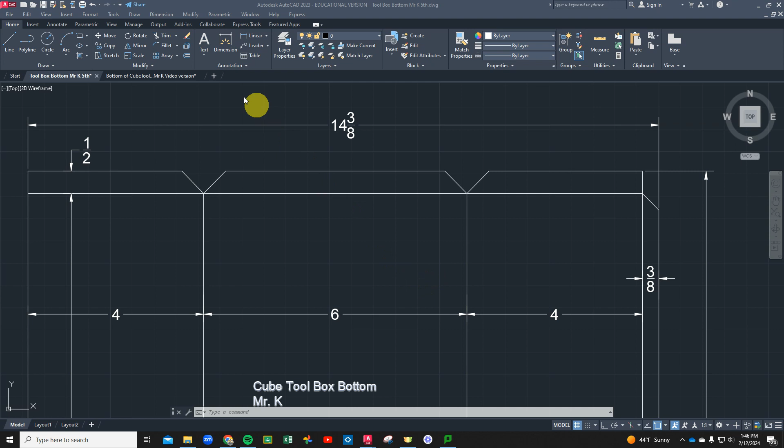For the next part of our sketch, I want to lay this out and cut our 45-degree lines in here. So this is what we want it to look like, and this is where we left off in the last video. So I gotta do a V-notch here, a V-notch here, and just a single here. Let's start here where it's a little bit easier.

Okay, so this is my intersection where our notching tool or our snips is gonna cut down here like this. And if I freehand that, I don't really know my angle, okay? It's asking me what my angle is or my length. So there's a couple ways I could do it. I could pull it this way and then tab and set this at 45 and hit enter. That's one way to do it, but I'd have to guess and remember my distance backwards here, and remember that going backwards would be 135. So if we get mixed up on that, I'm just going to undo this.

I want to show you this fantastic tool down here. We've used ortho mode so far, but next to it we have this polar tracking, and at least we haven't used that. Maybe you use it with other tutorials or classes. So here, if I have it set on the top, it's going to lock it into my polar directions, 90, 180, 270, so basically north and south. If I want to run it at a 45-degree angle, this will allow me to do it. So I set that at the 45, the second one down.

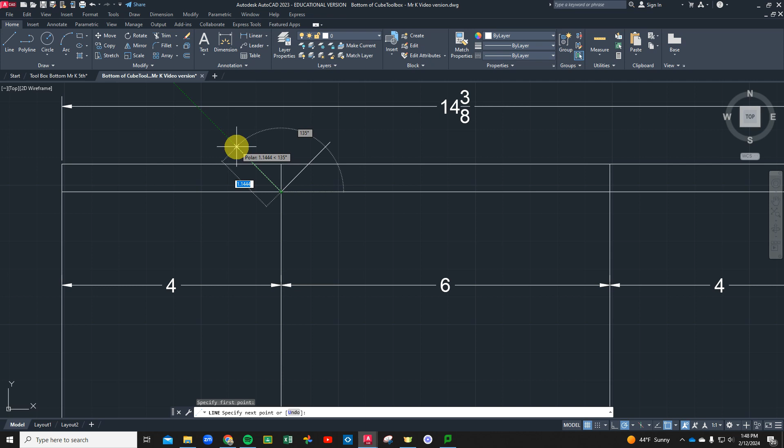Now if I go into my line mode, I click on my intersecting point, I drag it up, it's snapping into this exactly at the 45. I'm going to drag my mouse. I don't want it to get stuck on this line because I have nearest turned on, and it's going to want to click on here, and it's tricky. So I'm just going to make it longer. There's my tracking. It says it's exactly 45. I click and enter. Same thing, I do it to the right, I do it to the left, I click, there's my line, click and enter. And then we're going to clean all those up.

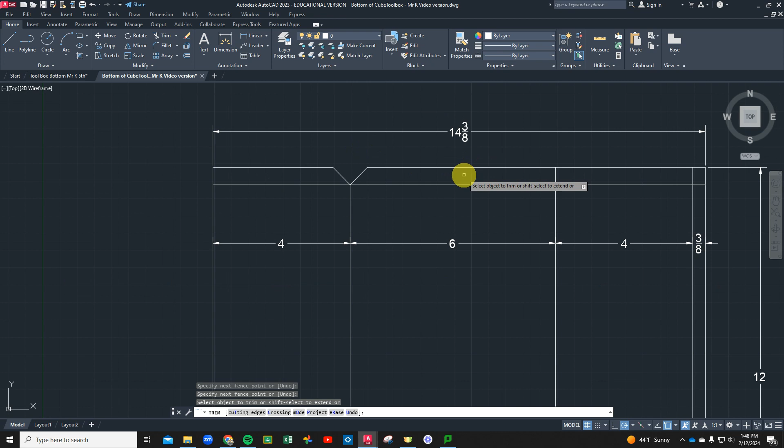So I grab my trim tool, okay, and I can go click, click, click, or I can go up and over and clean all those up like that. There is one. Let's do it again. Wash and repeat. So I grab my line tool. That's still turned on, so that should be good. Let's just draw all of them, and then we'll go back and clean it up. Might as well, we'll get in the mood.

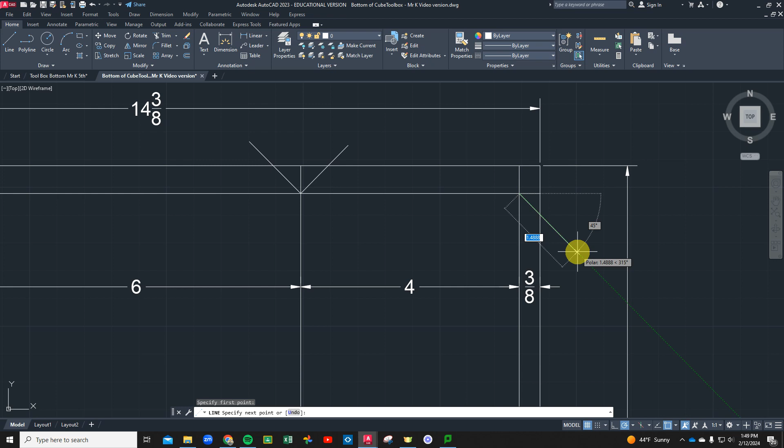So I go to my intersecting point, drag up, lock it in, enter. My right hand is on my mouse. I'm right-handed, so I'm going to do this with my right hand, and I'm going to hold my left hand on the escape key, so I don't have to keep going back and hitting escape. I'll clean those up in a minute. I go to line again. This one I'm going to go to this intersecting point. I drag it down now, and so that saves me having to guess the math of my angle by turning on this polar tracking. Drag it down, escape. This one I'm going to go up.

I'll try to zoom out a little bit so you can see how it looks in relation to the page. When it locks in with polar tracking, click, escape, and then these down here are going to the inside point where our fold line is going to be. Bring it down, get my polar tracking. I'm going to go to the left and to the right. And now if we had a bunch of these to do, we could copy them and clone them. But sometimes the less tools we need to use, the simpler and faster it goes. Okay, they're all in there.

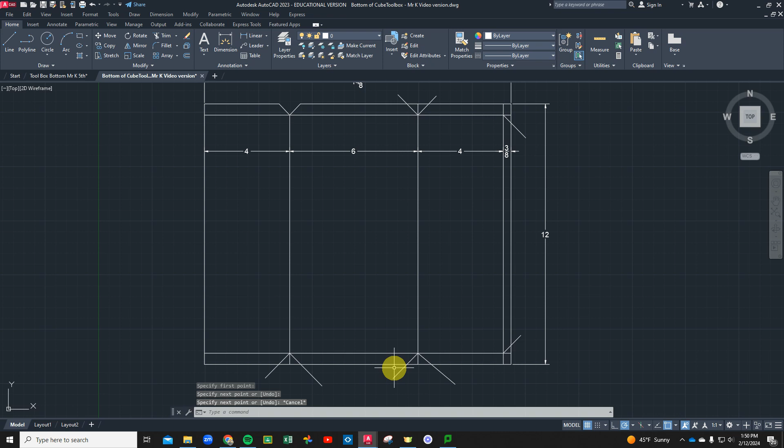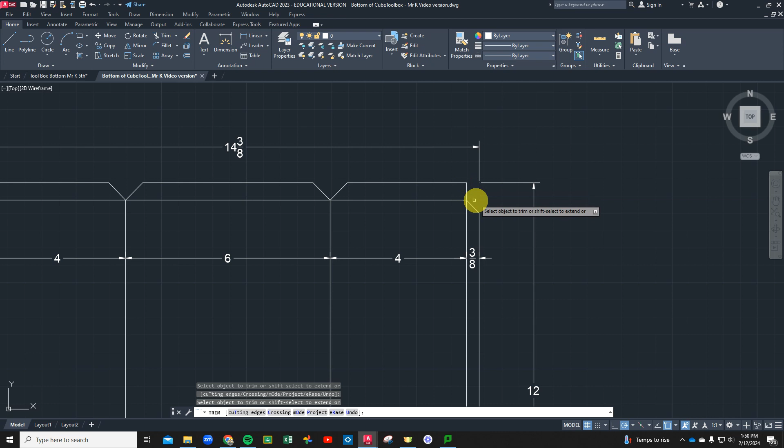Let's go through and trim it out. So I'm just going to zoom into my areas, and I go to my trim tool. I'm going to drag and draw a little line through here by long holding my mouse. Go zigzag, boom. That cleans all that up. I'm going to clean this up. Feel free to just click, and we want to have that go like this. So a nice 90 degree, and then this opens up, and then we have a 45 on this side.

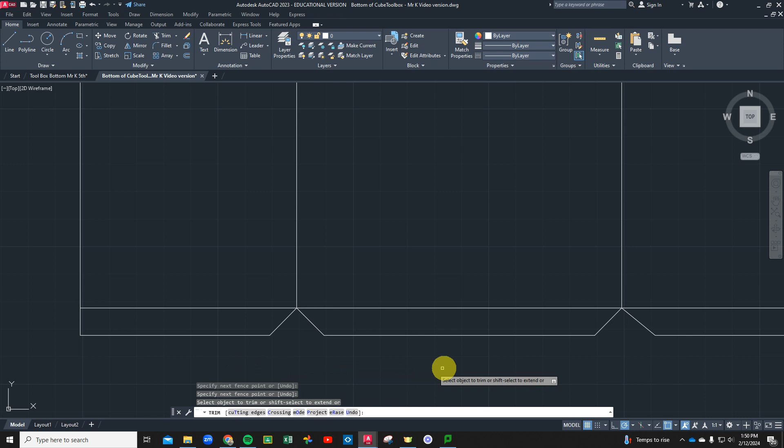Zoom in here, and we're going to do the same thing. I'm going to drag all this out and get rid of all that. Open that up. Same thing here. 1, 2, 3, 4, and slide this over. Remember you use your mouse wheel to pan right and left, and I click on the blank space here, drag, zoom, loop up and over, and we're golden on that.

Now what do we have labeled? We need to make sure our dimensioning is working. I'm okay with leaving my dimensions like this. They could go all the way over to here because I do want the overall measurement. So I don't want to trim that out. Hold on, let me undo, Control Z by accident.

Now what in the world, I lost my, oh snap. It undid everything. Sorry, stick with me 2 seconds. And we're gonna go real quick. Here.

Okay. What do we have next? What we want to do is dimension anything that's not in there.

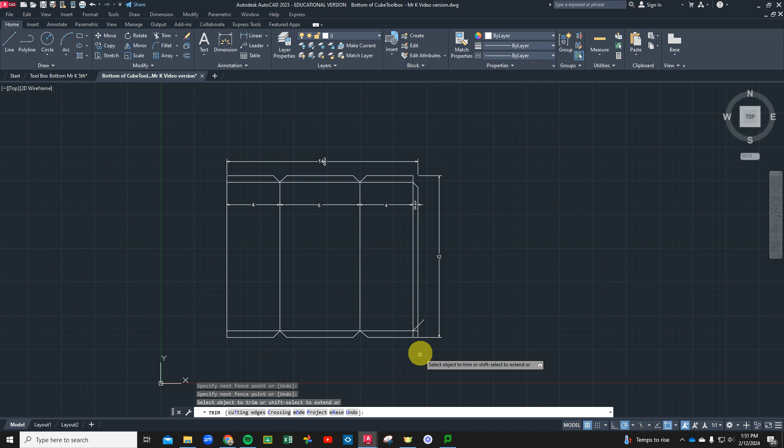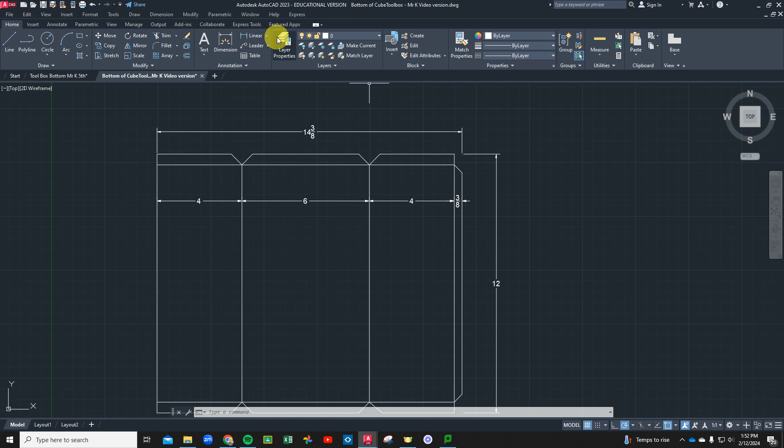All right, including these angles down here. Okay, I need to dimension the inside of the box as well, so I'm going to grab my dimension tool. I got the outside going across. Let's start at the top and work our way down. Okay, from this line to this line, it's giving me the 1/2.

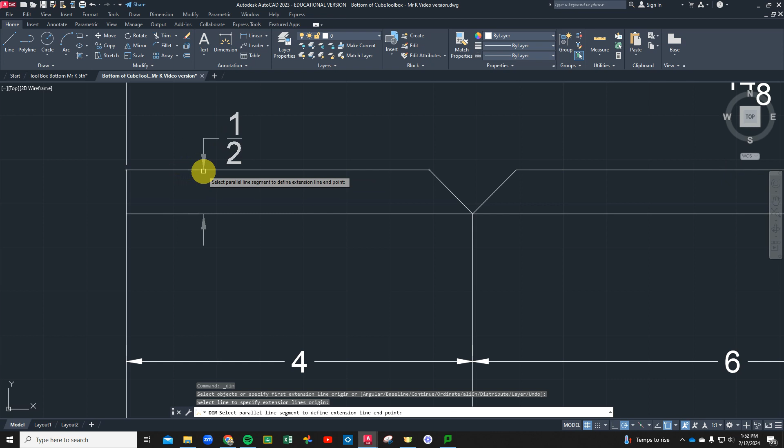I didn't like that. I might just have to zoom in more so it doesn't click specifically on the line itself. Let's see, let's try this longer one here. From here to here, slide it right to left, there, that's okay. And click to accept the location, there's one. Now, I need to do this one here.

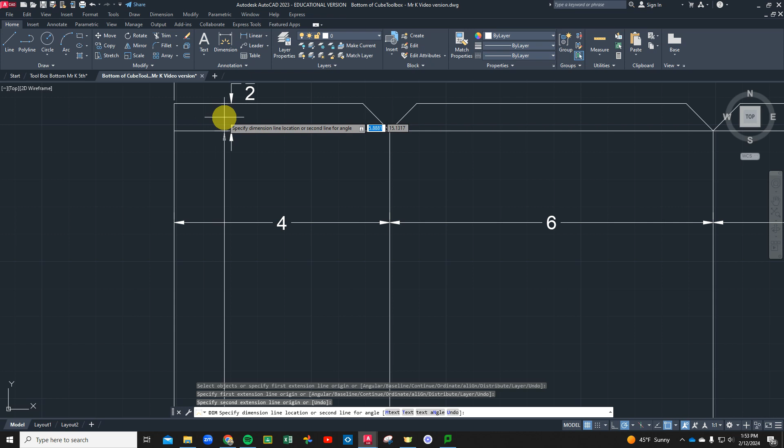My question to you: do you feel that we need the bottom one down here if our top tabs and our bottom tabs are typical? Okay. That's actually a redundancy, not necessary. Most prints won't have it. Will I take off points if you have it? No. There's times when you may want it.

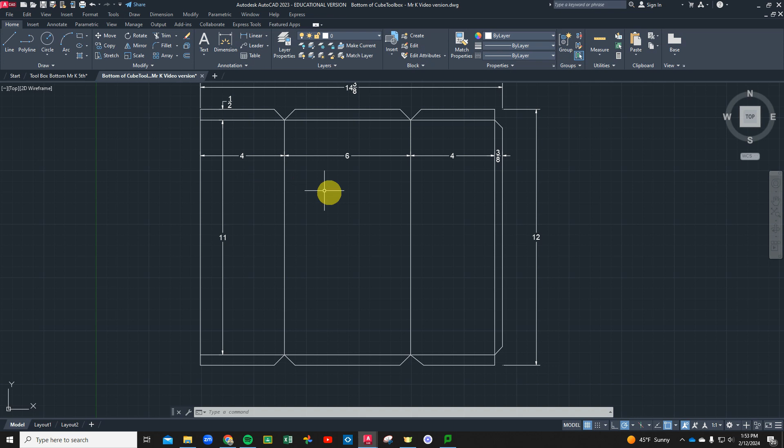If there's a doubt, like, is this really supposed to be there? We could use typical symbols and stuff as well. So I will let you choose if you want to roll that with a 1/2 inch or not. Otherwise we have the measurement there. Now, we also need to do our angle here. I want to show that my notch, my opening, is a 90-degree notch.

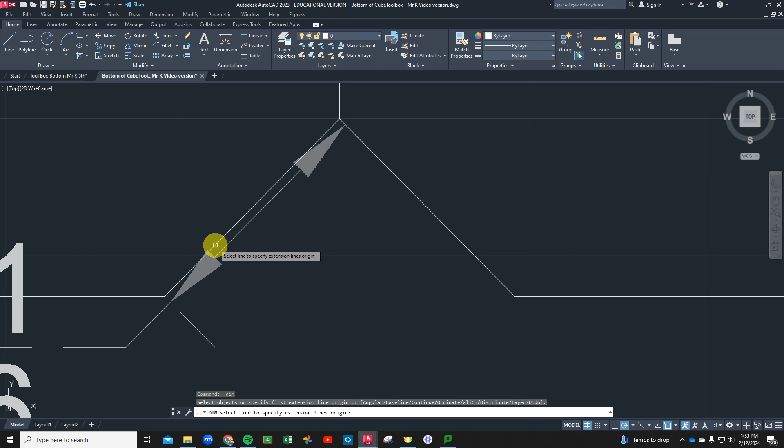We do that with my dimension tool. I grab my dimension tool. Now I'm going to zoom in, because if I don't, it's going to want to lock onto some weird snaps. I don't want it to give me the green triangle. Oh, I'm somewhere in the middle. There, that's what I want. So actually I had to zoom in a lot. I click on that line, I click on this line, and it's not giving me the green handle.

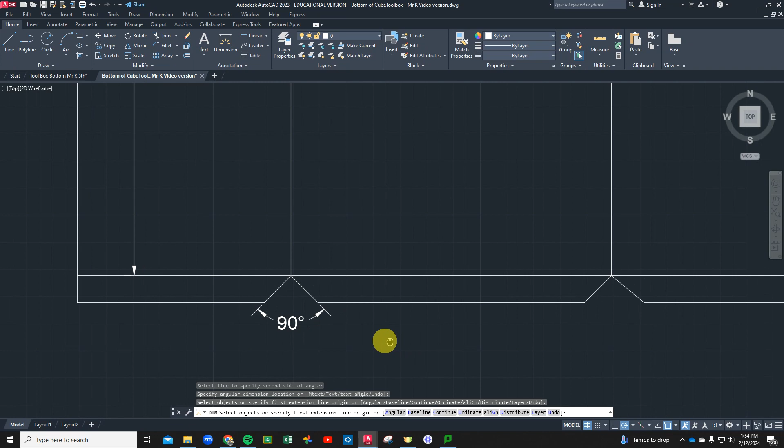Okay, I got to bring it out. That's giving me the arrows for the angle, and I want it to say 90 degrees. So how do I want to do that? I'll let you decide where you want to do that. That looks nice, but doesn't get too confusing. That's my 90. Here I want to show that this is a 45-degree cut from the actual bend.

We know that the opening is 90, but I'm going to go back to dimension, and from this bend line over to here, it should say, oh snap. This is great. This is why we need to know and dimension things, because our drawing is wrong. It's not 45. Yours may be 45. If so, perfect. If not, I'm going to show you how to get rid of this and fix it.

Should be pretty easy. I'm going to grab my line tool. I still have polar tracking turned on. Go down here, make sure I go past. Now it's 45, and you'll see that this line didn't reach it. So underneath my trim tool, if I pull down the handle, there's a hidden gem, my little Easter egg, and it's called extend. If I grab that, I can hover on the line here, and it'll extend it

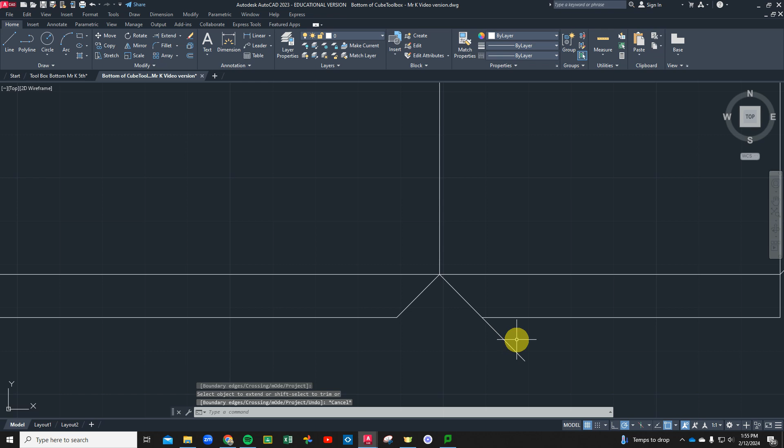and fill out the rest of that. Now I can hit escape, change this back to my trim tool, clean it up, and let's try our angle now. Okay, enter. Let's go to dimension and see if from this line to here, yep, we get the 45. We want it to come out on this side, somewhere where it looks okay.

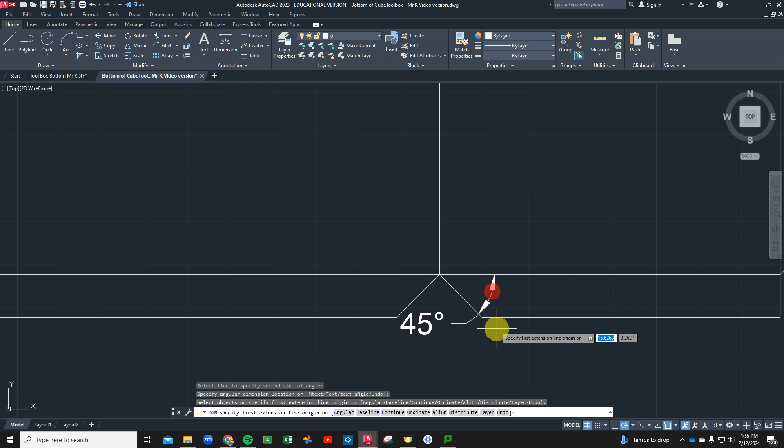I'm going to accept that, and let's see, I have my 1/2 inch here for my tabs, 3/8 for my hem, my angles are marked, my width and length are marked, my overall sheet metal is marked. That's all we need for our dimensioning.

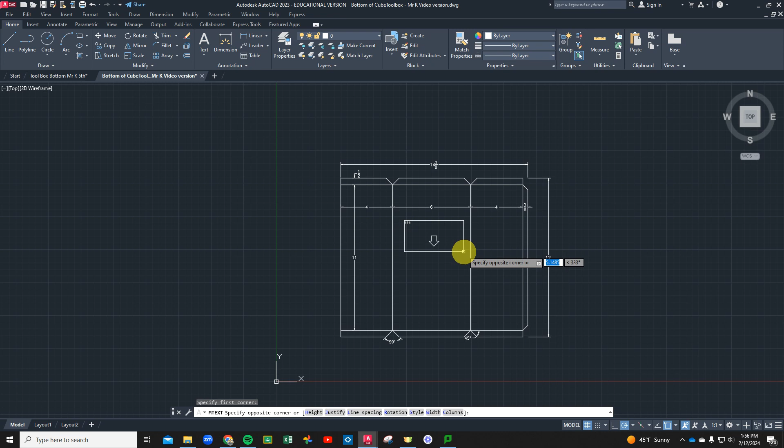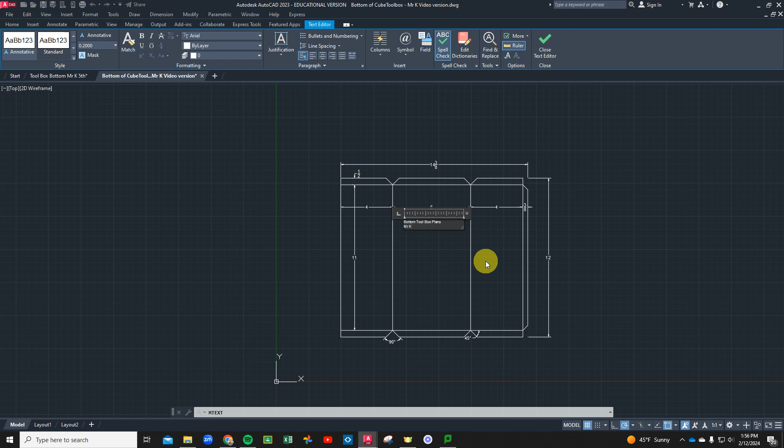I do want you to put your name on here, so we're going to grab the text tool. I'm going to drag and draw a box in here for my name and the hour you have class with me. In this case, I'm going to call it Mr. K. Let's give it the name of the print too. Bottom toolbox plans. Okay, Mr. K, and also put your hour on there so that if I print a bunch, I can divide them up into stacks and you can have your own drawing.

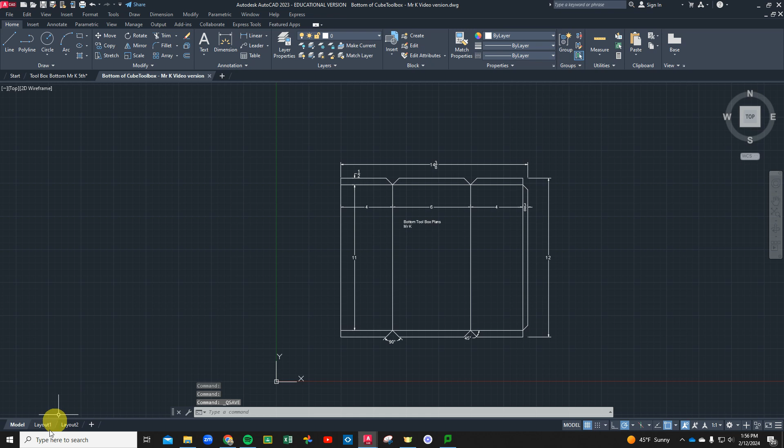Okay, we are getting long here. Cancel. I'm going to go up and save my work. The last thing I want you to do is fix the layout. This should be getting faster. Click on layout mode. Let's see what happens. If I try to pan, I'm on paper. It's showing that we can adjust how it looks on the paper. So this is moving the paper. Zoom in or out.

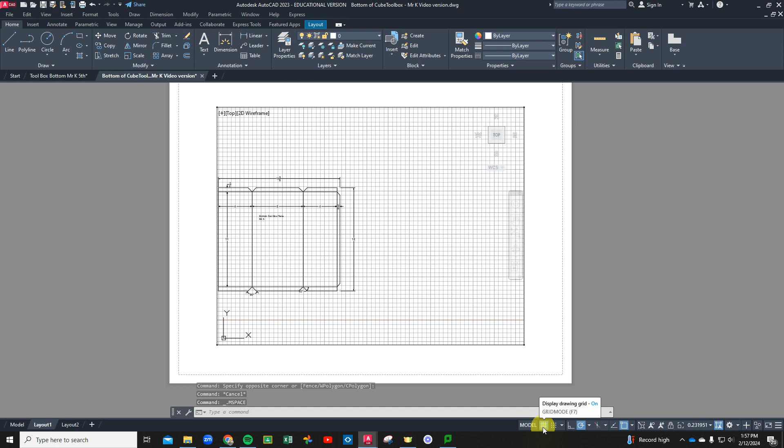I want to change how the model looks, so I click on model now. That's where I turn my grid off. This is where I use my zoom to extent. It auto zoomed it for me. If that looks satisfactory, I have my name, the plan names, all my measurements. We are going to go up to AutoCAD. I'm going to scroll down. I had to get the little screen recording thing out of the way.

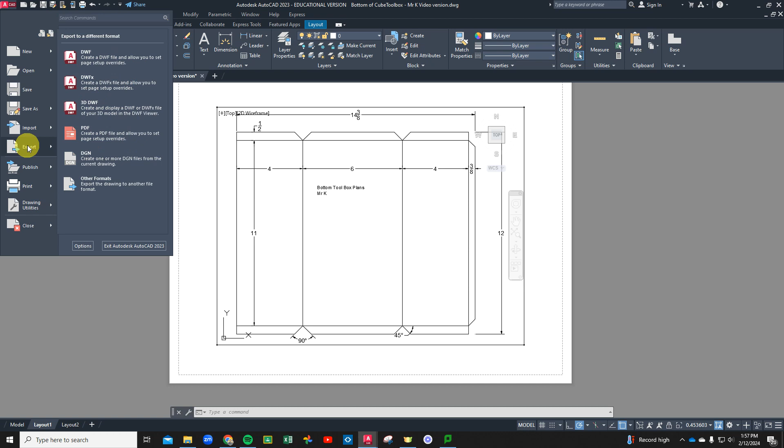I go to export, and we want to export this as a PDF. If you save that as bottom of your toolbox, just hit save, and it's going to give you a PDF version of that as well. I'm going to do that. I hit save, and voila. That's what you're going to turn in to our digital classroom online.